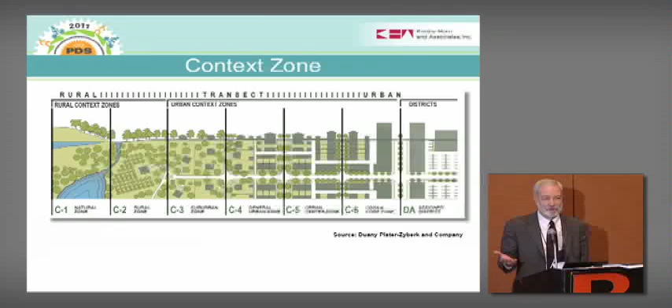The ITE Designing Walkable Urban Thoroughfares, a context-sensitive approach, is broken into these three major categories, and chapters fall into those categories. This context image that you've seen, I think, a couple times already this afternoon is one of the foundations of the document. It talks about organizing our system of thoroughfare design around these context zones of different kinds of urbanity, from rural to suburban to urban. And the document itself is applied in only these 4 zones. It's not applicable in the rural zone.

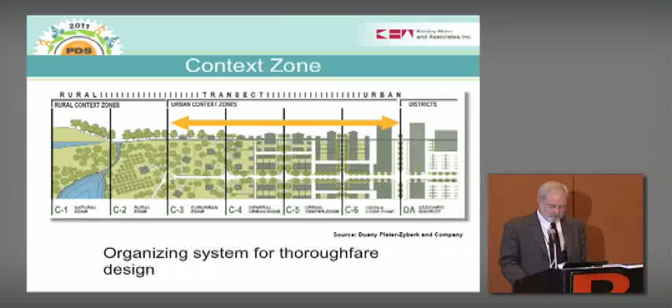One of the quotes in the document is that thoroughfare design changes as context changes. And I think that's an important aspect of this. And that the thoroughfare both responds to and contributes to shaping the context and defining the place. And so it's a chicken and the egg kind of a relationship.

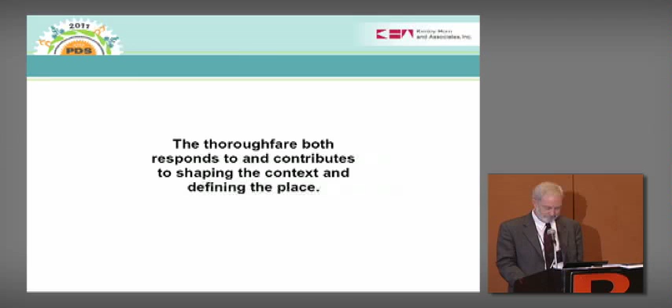So most of you may be aware of this document and its use in designing the thoroughfare, the facility. But just to bring everybody up to speed, let me go through that part of it quickly, and then I'll back out and look at the planning and the network aspects of it. The document identifies 3 thoroughfare types. Not included in the document are local streets, residential local streets, or the expressway. These are only thoroughfares, kind of that middle range.

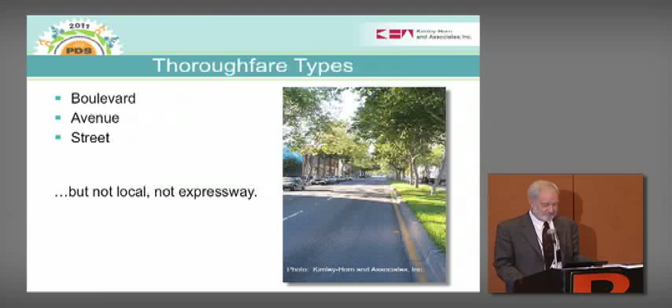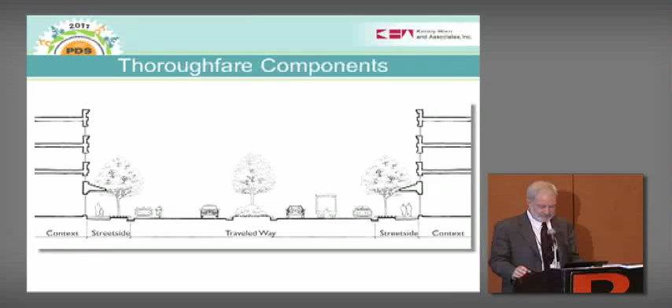These are the components, the thoroughfare components that are varied with the context. They include the traveled way, which is the street that we usually think about, but also the street side component and the context itself, which would be outside of the right-of-way.

So this is an example of a boulevard. Boulevards are 4+ lanes. The target speed on a boulevard is 35 miles per hour. One of the terms that was debated a lot in developing this manual was that target speed, that is the speed that we're targeting drivers to drive at. The boulevard is mainly for longer trips, for freight movement. It's where access to property is managed in an effort to move the longer trips. Parking can be found on boulevards, but not always.

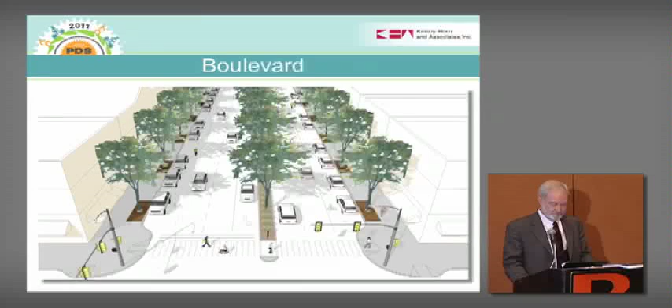The avenue is a step smaller. It is a 4-lane maximum facility. Its target speed is 30 to 35 miles per hour. Has much more focus on land access. This is where you can find local transit, local deliveries, and curb parking is common on avenues.

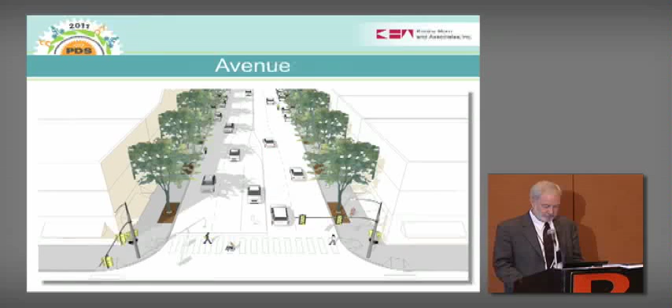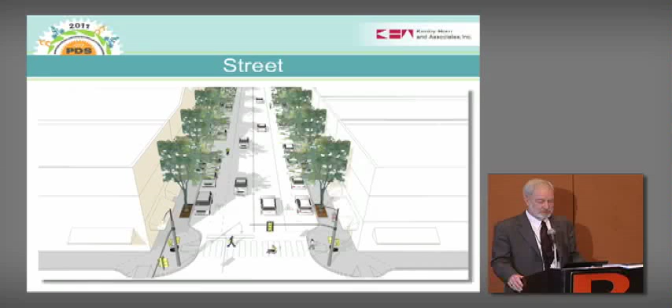And then down another step is streets, where it's 2 lanes maximum and the target speed is 25 miles per hour. The street is much more about land access, connectivity. The great commercial streets are typically in this street category to serve land use.

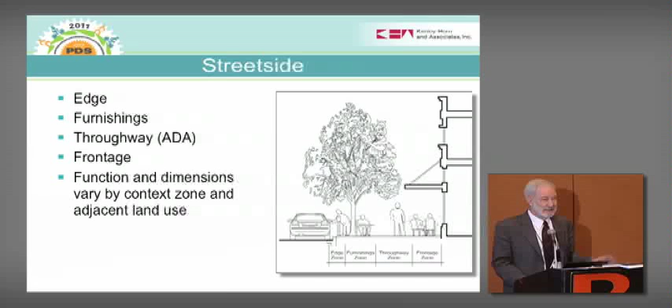And the street side zones, we talk about the width and function of the zones, and it's meeting the ADA requirements and providing a pedestrian buffer, as well as other amenities, plantings and public art, and this is where places are created in the street.

And so this is the matrix. The manual's written by engineers, so we have to have one of these complicated matrices. But you can see the 4 categories in the middle are the street types that we've talked about, and at the top, we're not talking about freeways or expressways. I actually glossed over the multi-way boulevard, but it's a type of boulevard.

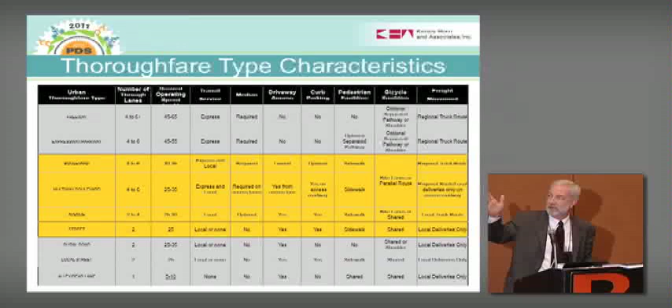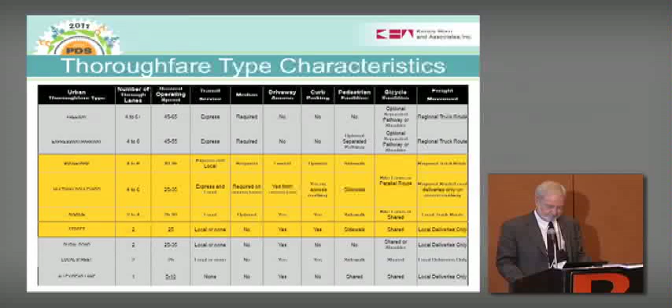And so we've got boulevard, avenue, and street, and across the top, those criteria that I listed quickly of number of through lanes, operating speed, the kind of transit, the kind of parking that's appropriate on each of those thoroughfare types. So with that, let's dive into the network aspect of this. As I said, the planning part of the manual is broken into kind of a process. How do you go about doing this? And then a discussion on networks and corridors.

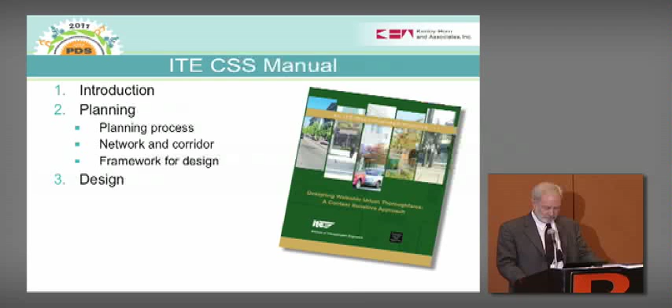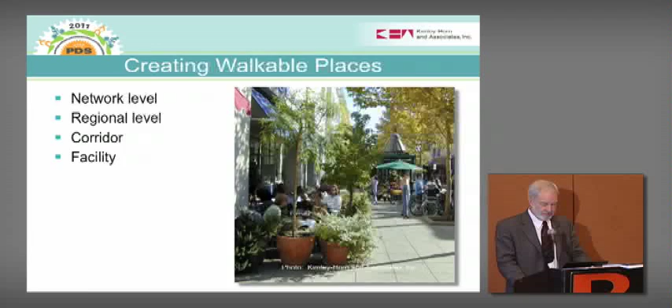And it talks about creating walkable places as being an examination of all of these levels of streets, the network, the regional, the corridor, and then all the way down to the street facility. Because challenges encountered creating more walkable urban thoroughfares can be resolved at the scale of the network or corridor.

I think we very often find ourselves arguing about an issue on a street when that argument ought to be on a bigger issue about the network. Where should the throughput be? Where should the bikes be? It goes back to this balanced, layered networks.

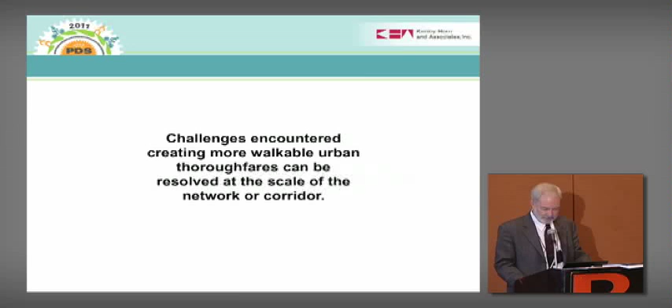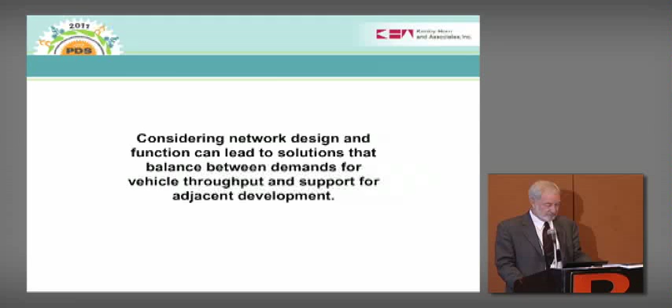And so considering network design and function can lead to solutions that balance between demands for vehicle throughput and support for adjacent development. And you covered this great about prioritizing and emphasizing the various modes on each facility. If you look at the network, then you can make those decisions about which parts of the network ought to satisfy which of these elements.

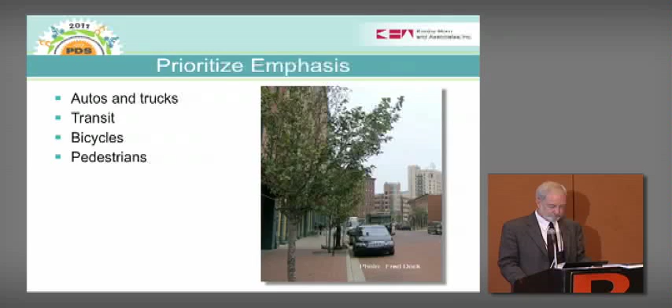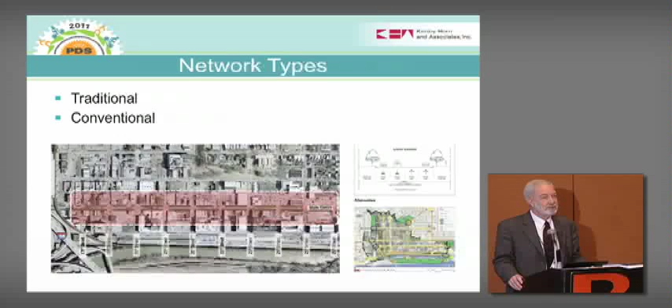A bit more about network types, covered great by Ian earlier. These images are the traditional network. It's about connectivity and alternative routing, block size, and the conventional. And as you can see, this arterial, you can just imagine what it does to the network around it. It's literally impossible to cross this except at mile spacings where the traffic signals are. There are no left turns across it, let alone pedestrian crossings.

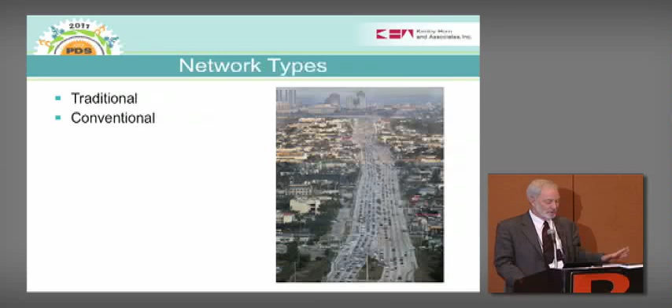And so if you have this kind of a facility, then the rest of your network is going to be impacted in more of a conventional configuration. So the differences in networks, we've talked a lot about block size, connectivity, some about degree of curvature. There's some discussion about how good networks need to be straight. I'm not sure I agree with that, but they do need to be connected and have small block sizes.

I'll go over this quickly and would love to come back to it in Q&A or in discussions later. We've talked about some of these indices of how good a network is, but they've been reduced to ratios to actually test and compare networks. And so, as I said, I'd love to come back to this later and talk about these indices, how they're calculated and how we get to them.

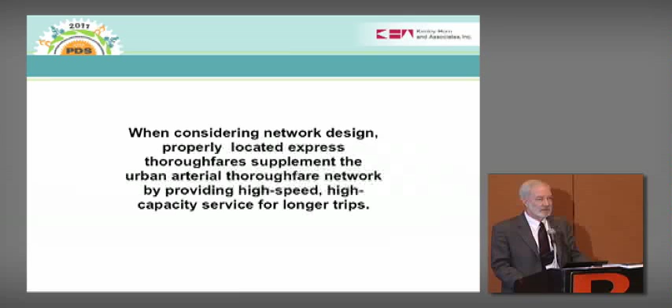So when considering network design, properly located express thoroughfares supplement the urban arterial thoroughfare by providing high-speed, high-capacity service for longer trips. The guide goes into this in some detail to say not all streets should be 2 lanes, low volume, low speed, that there is a role for these higher expressways, but their role needs to be identified. And in the planning portion or the corridor portion, these are the kinds of traditional steps that you'd go through, and I won't cover any more of that.

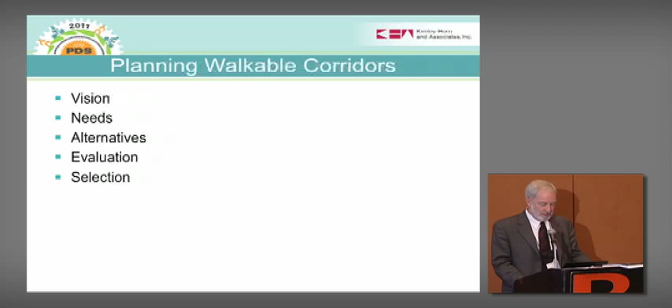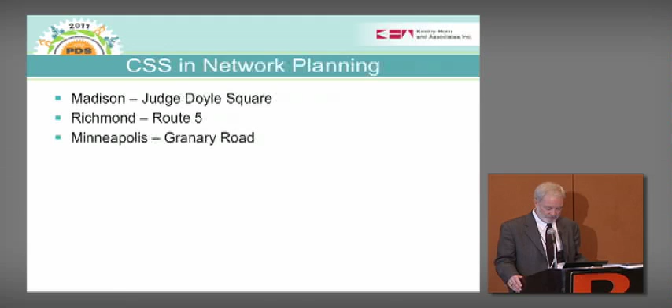So if you've had enough of the gory details, I'd like to go through a few case studies, one in Madison, Wisconsin, one in Richmond, Virginia, and one in Minneapolis, Minnesota. So how many people are from Madison? I know at least one. Oh, a couple. Good. You'll know the site. Hopefully you know the project is going on, and I know some of you have been involved in helping identify the network in Madison.

It is the state capital. Probably the capital of a number of things, isn't it? Demonstrations and recall elections, and farmers markets. That's true. It is a great farmers market.

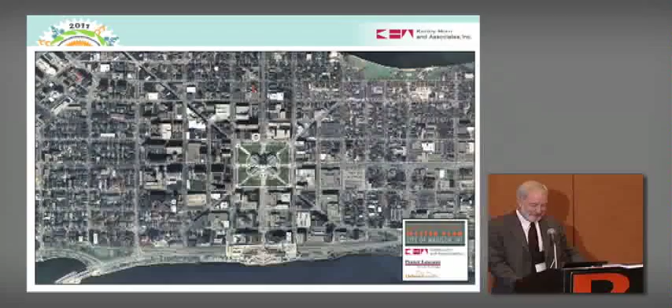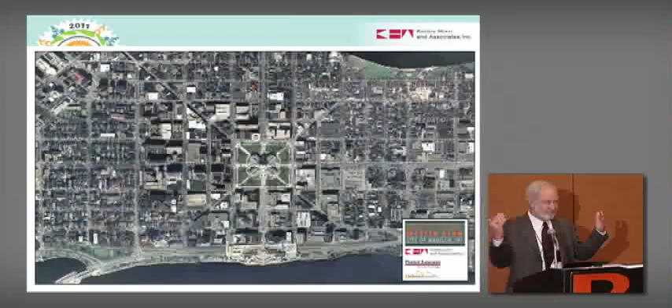This is the layout. Madison is an isthmus, and so for you geography buffs, you know that's a narrow piece of land between two bodies of water, and they are two great lakes. Well, not capital Great Lakes, but they're really wonderful lakes that create this isthmus, and it's a John Nolen design plan of great visibility and sight lines. This is our site.

Madison, I guess like other cities, likes to number their blocks, and so we've got Block 88 and Block 105. On Block 88 is what was built as the federal courthouse. And Judge Doyle actually presided there. That's the name of the project. But I think it was in the early 70s when it was converted to a municipal building and city offices moved in there. So that's on Block 88. And this is Block 105. This is Government East parking structure, and doesn't follow the John Nolen architecture, but is like early 50s grotesque architecture.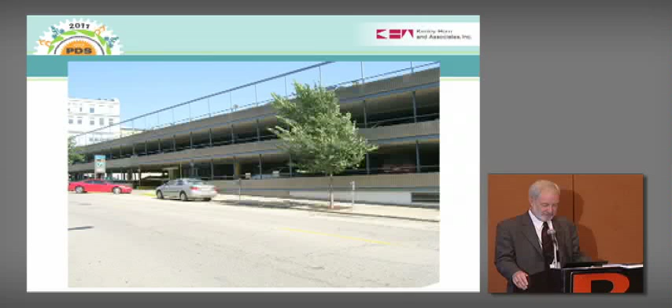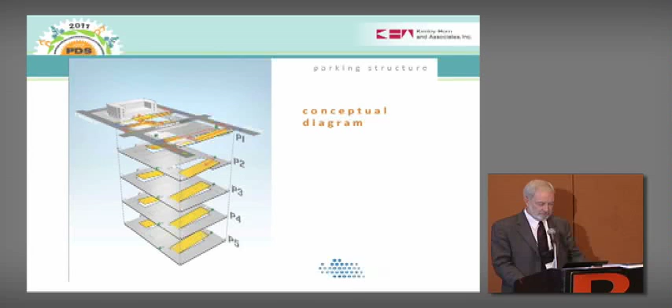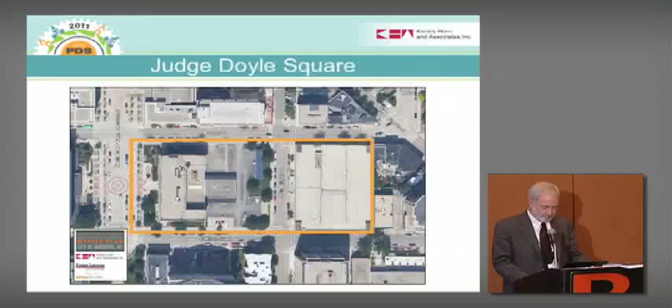So the plan is to combine those two blocks and recreate the parking below ground in 4 or 5 levels of subterranean parking, and then create a developable parcel on Block 105. And so you can see again in this plan view how that might work. The municipal building is off to the left here. That would definitely be preserved in one use or another. Parking would go under the 1.5 blocks, and then this block would be opened up for redevelopment. It will have a bike station. Mobus Bike Planning is looking at the feasibility of a bike station in this facility.

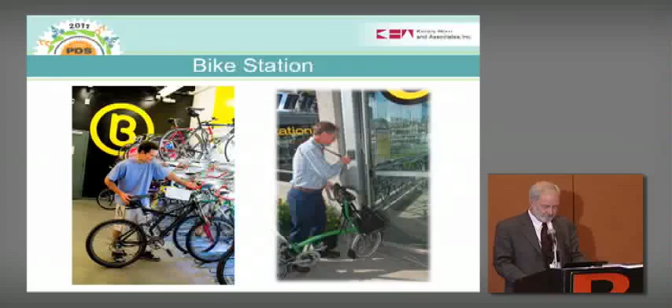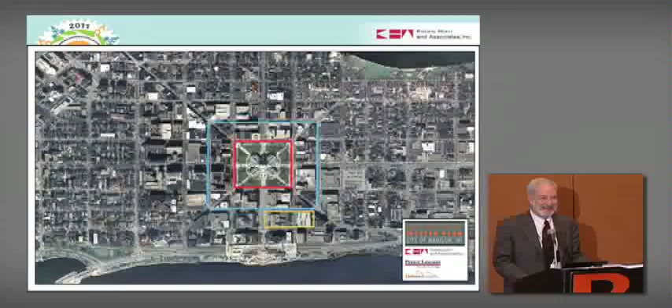One of my Madison guys is smiling. I was a grad student in Madison, and the first time I tried to actually drive through there, I went around, I think, 2 times. Once shot out that way, once shot out that way, and it took me 45 minutes to drive 1.5 miles, and I gave up in disgust, went home and got my bike. That's when you became a bike advocate? No, it is. Once you get going, there are diagonal streets, and yeah, it's fun.

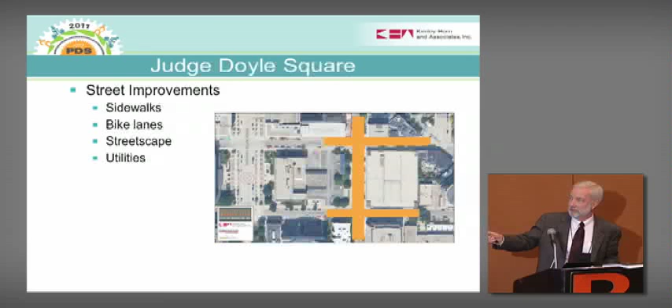So as you could see, our site is located on the outer loop, which is, at least in downtown Madison, the throughput street. I mean, it's not a freeway by any means, but we're in a very early part of the process, and our challenge as a part of coming up with a conceptual plan for these 2 blocks is to handle this one-way outer loop in an appropriate way, connecting the square to the bike station.

I failed to say that there's a great bike route path along the lake here, so connecting that with the existing street infrastructure and providing bike connectivity and pedestrian connectivity, and connectivity to the convention center, which is the Frank Lloyd Wright icon you can see down at the bottom of that axis there.

Comments from the Madison folks before I go on? I actually think there's some debate among city folks about where bikes should be.

Why? I shudder to think how much 5 underground levels of structured parking will cost per car. Who's bearing that cost, and how is that cost being justified in light of, well, I presume Dave Cieslewicz is still the mayor, and he isn't. Oh, okay, that's why there's 5 layers of underground parking. Never mind. It's actually the mayor that was in office when they bought the municipal building in the early 70s.

He's back again. What's the cost per space, and who's bearing that cost? And is that actually being made explicit, or is it kind of being hidden and folded into the project? Because that's got to be ridiculously expensive, and it doesn't seem appropriate to a core urban context like this where you want to be promoting transit, not driving.

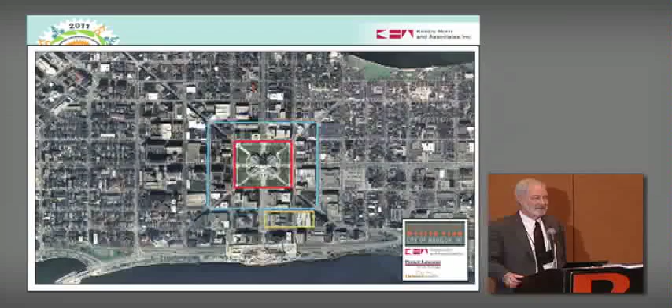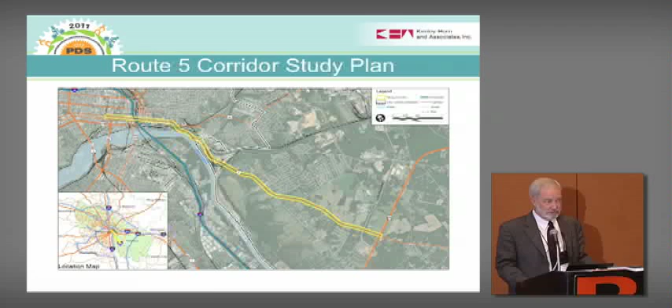This is the Route 5 corridor study. Route 5 starts in downtown Richmond and travels through Shockoe Bottom and through some fairly rural areas as it leaves downtown, as it leaves Richmond and moves into Henrico County.

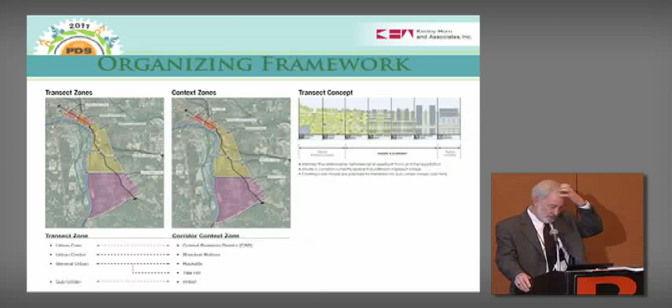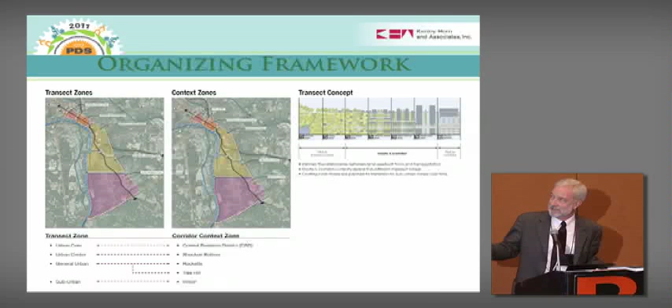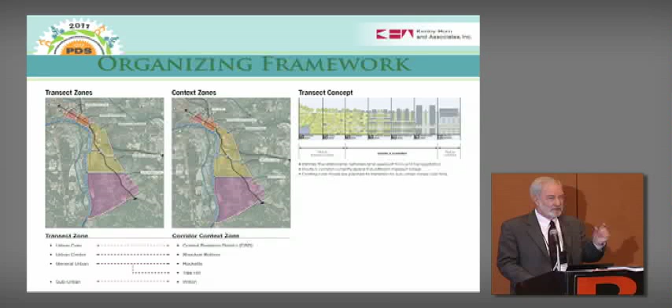One of the first steps that we took in this corridor study was to organize the project using the transect zones. And so you see on the left, here's the transect concept. We applied that concept to the zones along this, I think it's a 12, 13 mile corridor, and then converted those to context zones. Pretty much a one-to-one correlation between the two in order to organize the planning and design of each of the pieces of the corridor.

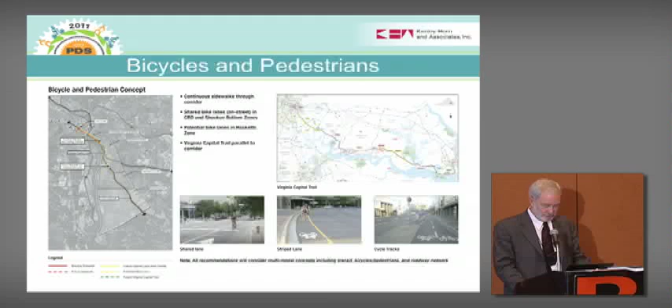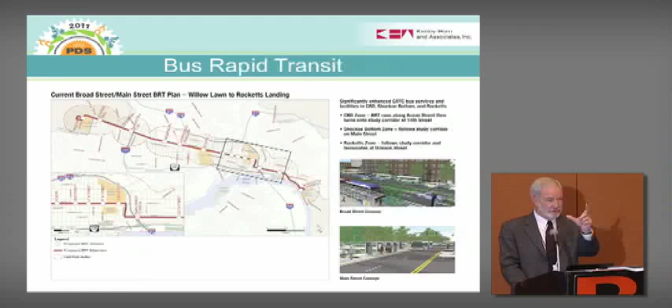A big part of this corridor is the Virginia Capital Trail, which runs along the river. Well, it's actually just being planned now along Route 5. And so it truly was a multimodal corridor study because that bike trail was already in the planning stages. And bus rapid transit is in the planning phases for about the first third of the corridor in the downtown and through Shockoe Bottom. There were 3 transit alternatives, depending partly on the context and the ridership.

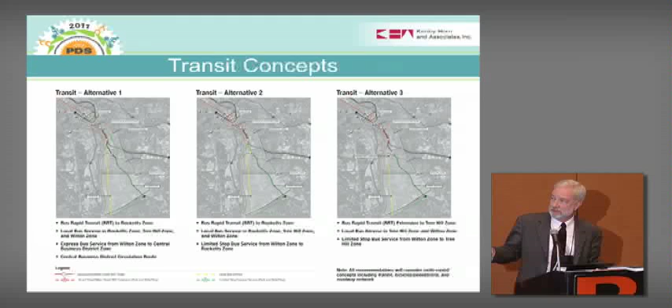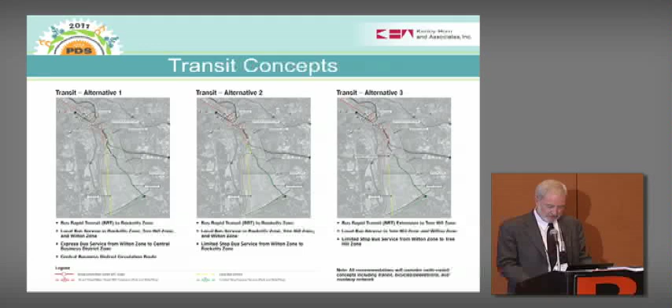At this point, I probably need to say that this rural-looking area on the previous aerials, there are, or were, some significant projects planned there in what's called Rocketts Landing, drawing a blank on the names of the others, but they're going to come up. Along that corridor, lots of residential development. Tree Hill and Wilton, multi-hundred and thousand acre developments.

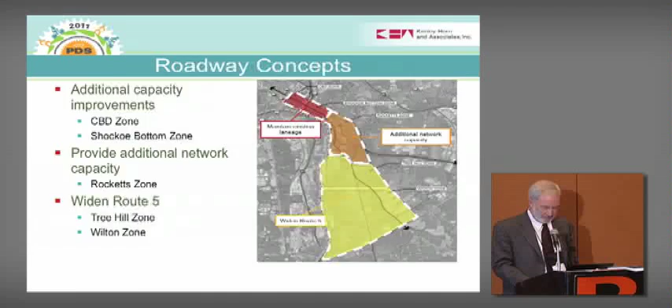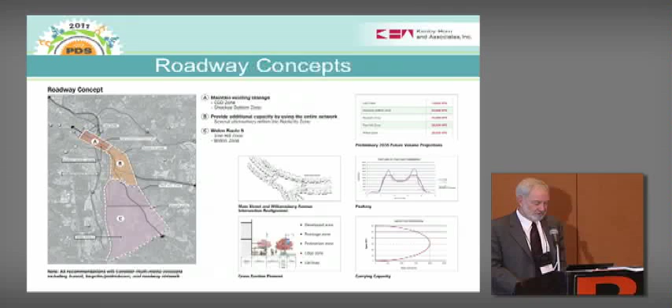And the image on the bottom right there is one I wanted to talk about just a little, because I first saw it at Purdue University in Traffic Engineering School, and go back to it from time to time. It is the speed flow curve. It wasn't nearly as graphical when I saw it in college, but we have simplified it a bit. On the horizontal is flow in vehicles per hour, and the vertical axis is speed.

And so as you start out with zero speed, you gain in the amount of flow you can handle, but only up to a point where it starts to double back, that at 50 miles an hour, you're carrying the same amount of traffic as you were at, oh, I guess it would be out here, at 10 miles an hour. And so the whole concept that let's make the thoroughfare faster so we can carry more traffic is a fallacy.

And if you stand beside the road, which we traffic engineers do all the time, and watch traffic go by, I think you'll realize that at slow speeds, those cars don't go by very quickly until you get up to 30 miles per hour. But then faster than that, the following distance starts to increase. And if you stand next to an interstate, or maybe over an interstate would be safer, a new car doesn't come by very often. When they do, they're going fast.

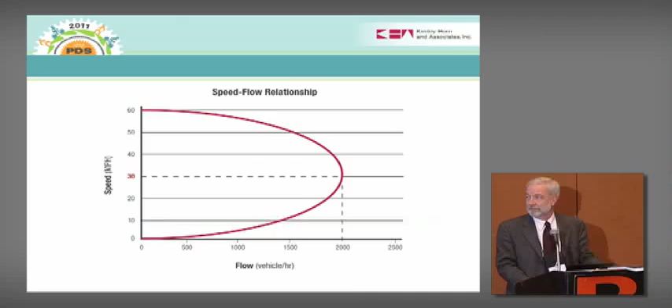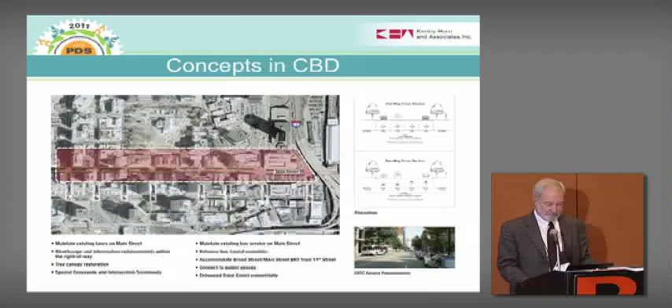But I know there was a session earlier about speed, and maybe we can come back to this in some of the discussion about how speed enters into the design of our networks, let alone our thoroughfares. So these are some of the concepts that we came up with in this corridor study, again, in the CBD, pretty much maintaining what was there. The next segment is called Shockoe Bottom, and we're maintaining the network as well as the curb-to-curb distance and looking at using that distance in a more optimal way.

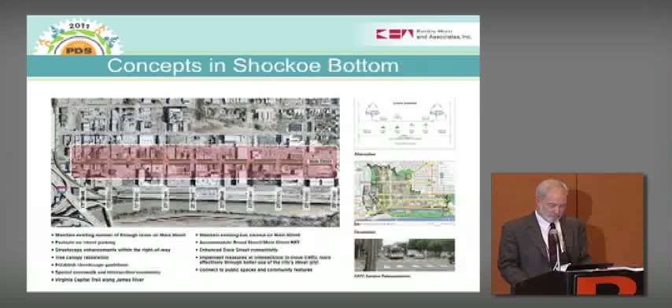But it's this Rocketts zone where the alternatives were really developed. This street network that you start to see here is the beginning of a pretty good TND, traditional neighborhood design development called Rocketts Landing. Right on the river, some pretty good 4, 5, maybe 6-story densities using existing brick buildings, and as you can see, the beginnings of a downtown street grid and network. And so the challenge was to look at the context that was creating and recommend adding capacity in the corridor consistent with that.

And so this shows a little bit about the alternatives that we looked at. And basically they were to improve this part of the corridor, and when I say improve, Ian Lockwood would give me a hard time about that because he doesn't like that word. Widen the corridor, improve it for motorized vehicles, or would we widen it over here? And I realized that this is already 4 lanes and then just kind of stops. And so there was some attraction to saying, well, let's make the rest of it 4 lanes to lead up to it and maintain what was already there in Rocketts Landing. So let me click through a couple of these.

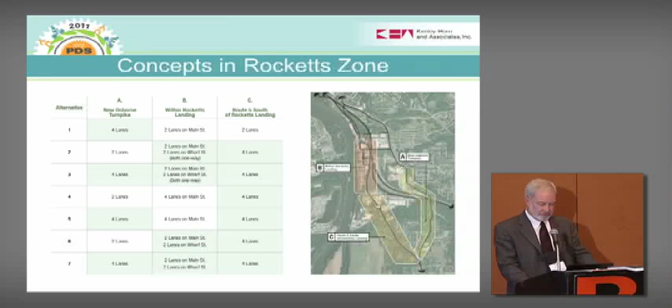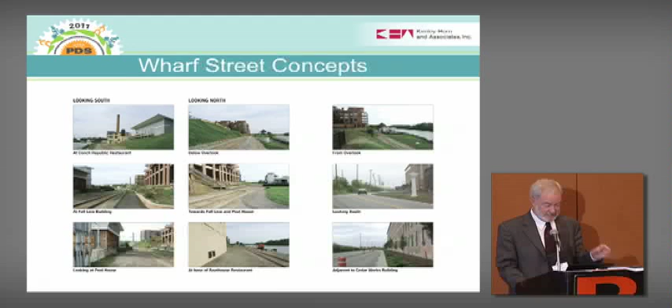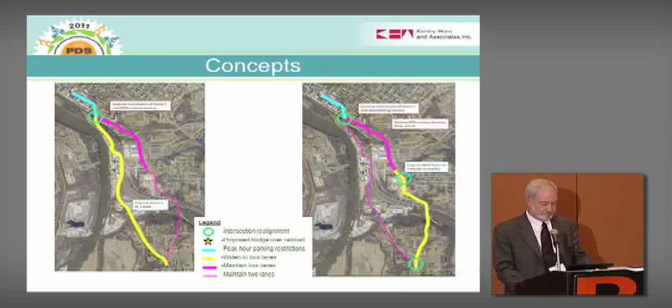Quickly about the transit alternatives that were also a part of the work. And the last few context zones as you move what looked like south. In the Tree Hill, more of a boulevard type use in the last two zones. So now, if I can, I'll move to Minneapolis. Any folks from Minneapolis?

Just like to know who might be out there, who might be a client or a concerned citizen that's going to jump up when I say something.

Have they won a game yet this year? Oh, sorry.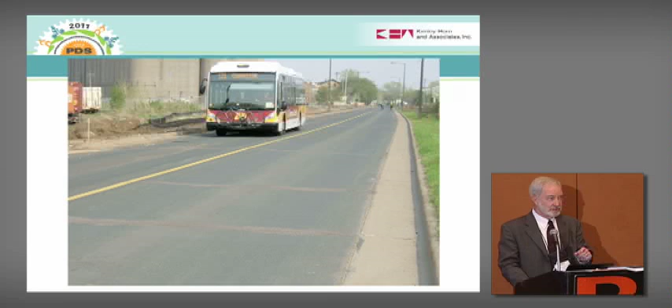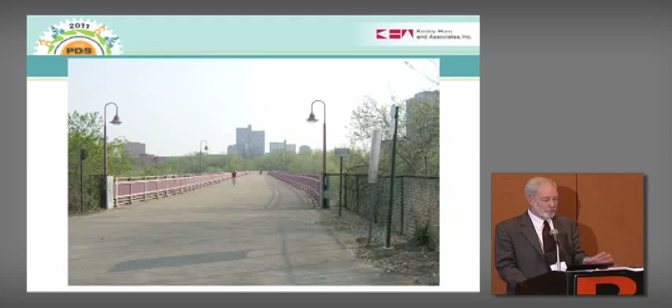So one of the streets leading into this area is a transit bike facility, only buses and bikes. This particular section of it will become the LRT alignment. And the other end is this great bridge over the mighty Mississippi, but very poorly connected. So this is the no-build option.

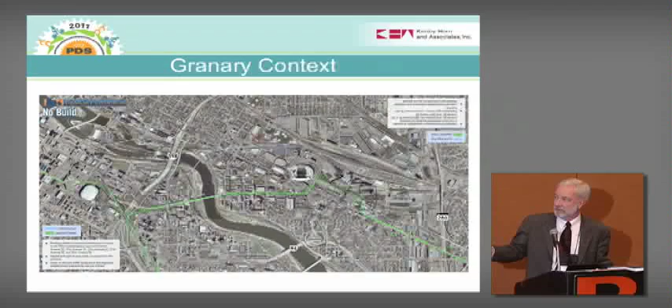The reason for the study is to look at these land uses on the university and elsewhere, and how better to connect those and make them more viable. Because, again, because of the railroad there, those uses are way underutilized and not very well connected. This is the rest of the corridor. This is what you might call the natural bike part of the trail. And all the streets are up above, a grid network of streets up above.

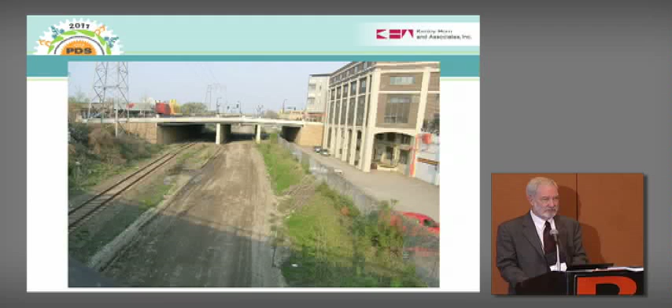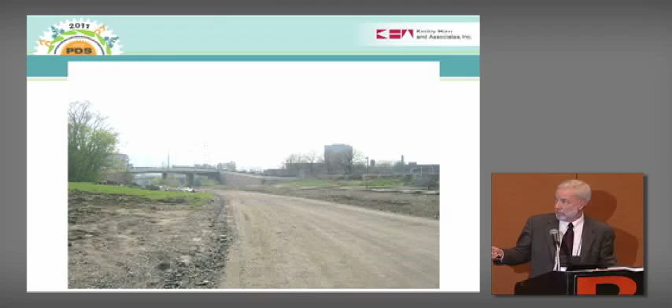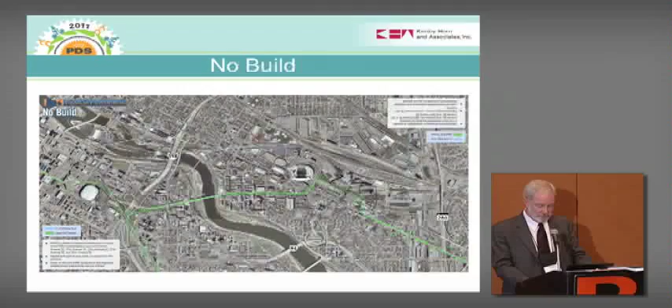And so we're looking at ways to use this corridor in the correct context to both connect streets and improve the trail. So one of the options would be just to connect these streets in the eastern portion of the zone, because that's where some of the immediately viable industrial uses might be. The next option would be to continue that road, Granary Road, through the rest of the area, opening up some of these uses as well.

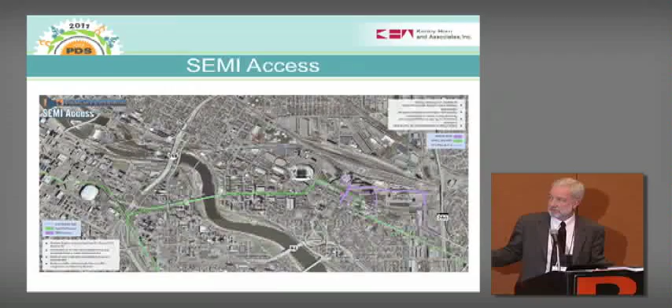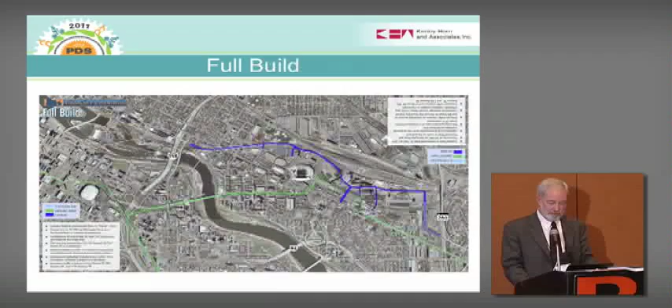This is the full build, which uses the whole corridor for cars, but within context, certainly providing for bikes and peds and other uses. And really some of the discussion is starting about what else to use that trench for, because you saw how kind of abandoned it was. Do we just want a road through there, or are there other opportunities to create great places in that new corridor? Again, that project is about halfway through the planning process. So now that you've seen how it works, we'll open it up for questions.

Yes, sir. Well, actually, we'd like you to explain a little more how it works. Maybe take this Richmond case. How did having those different classifications of roads make a difference? Because we could have skipped all that stuff that you gave in the introduction and simply said, we want this to be 4-lane or 2-lane. Could you explain more of how you used, do you want it to be more like a main street, or more like an avenue, or like a boulevard? How did that context help clarify what the alternatives were and help lead to good decisions?

Great question. It definitely provided a vocabulary to use with not only the city officials and VDOT, who is a stakeholder, but it definitely provided that way of talking to the public in public workshops, and provided a way to say, yes, it may be 4 lanes, but don't think about 4 lanes in a standard way throughout the whole corridor. That a 4-lane avenue is different than a 4-lane boulevard.

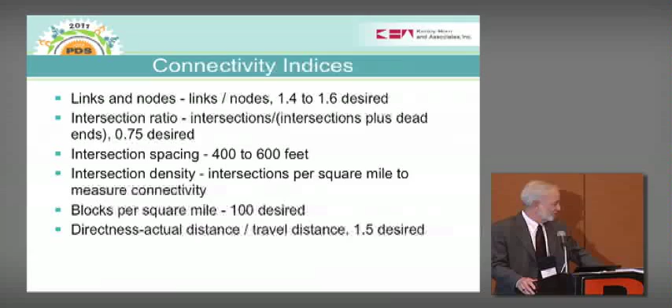And then this one, directness. So the directness ratio is the actual distance, as the crow flies, divided by the travel distance. We saw some classic images earlier of how far you have to go in a cul-de-sac neighborhood to go a quarter of a mile. So if we can keep that down, ideally it would be 1.0, but 1.5 is considered desirable. These kinds of indexes are available from a lot of different sources. I think they're most useful in comparing. I'm not sure they're as useful in rating a network, but in comparing two networks they are. Or in thinking about how to improve the network.